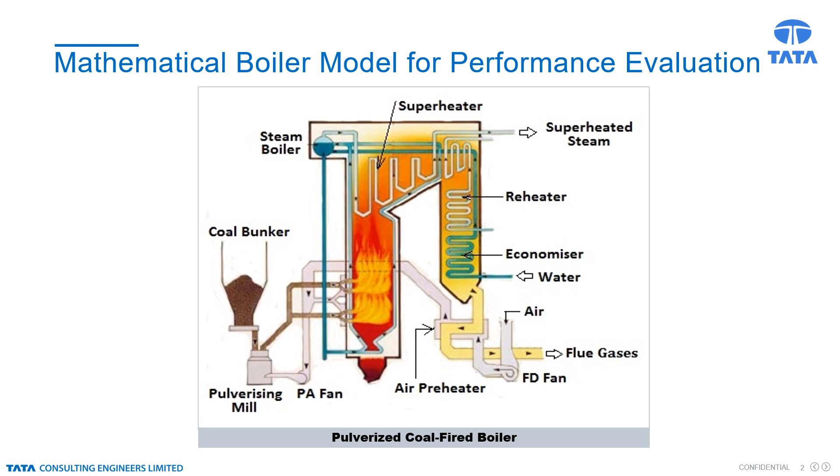Mathematical modeling of boilers for performance evaluation. Boiler is one of the critical equipment in a power plant. A well-designed and operated boiler is important for its performance and reliability. In this video, I would be explaining the details of the boiler model developed by Tata Consulting Engineers, TCE.

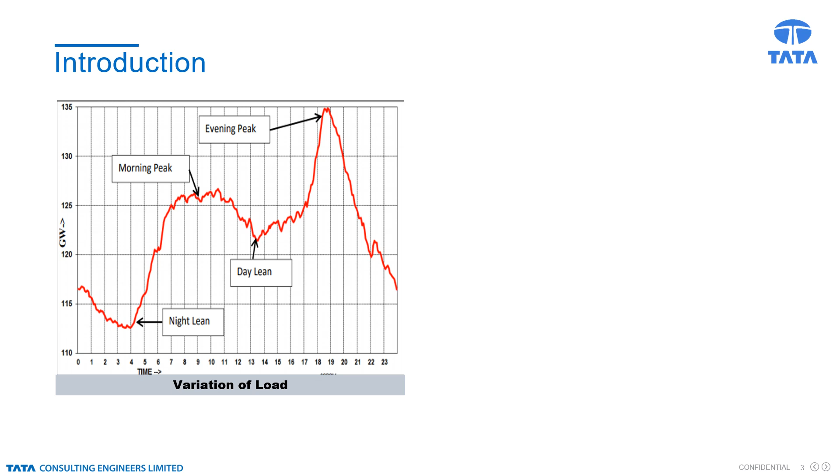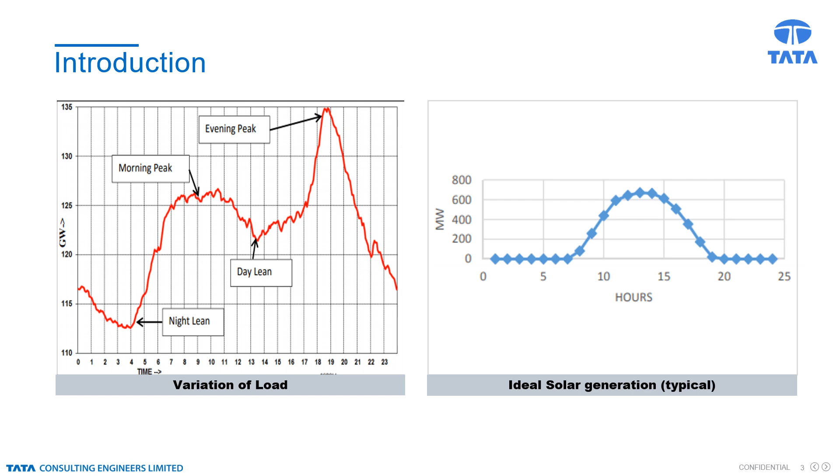Indian power sector is going through a transformation phase with focus on green power generation. Coal power plants, originally designed for base load, are forced to operate under partial loads to take care of the variable nature of renewables. Dealing with variation in coal quality and flexible operation of coal power plants without compromising on safety, performance, and reliability are the present challenges.

Mathematical models can be used to evaluate and predict boiler performance under variable operating conditions. TCE has developed a steady-state mathematical model from first principles for pulverized coal-fired boilers.

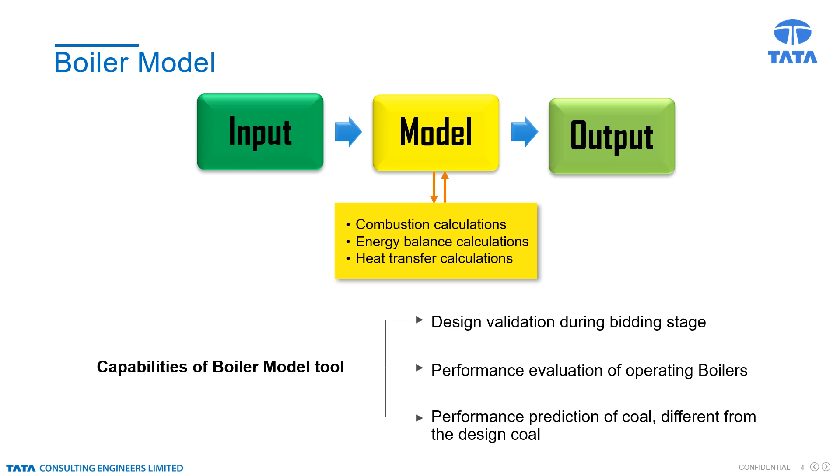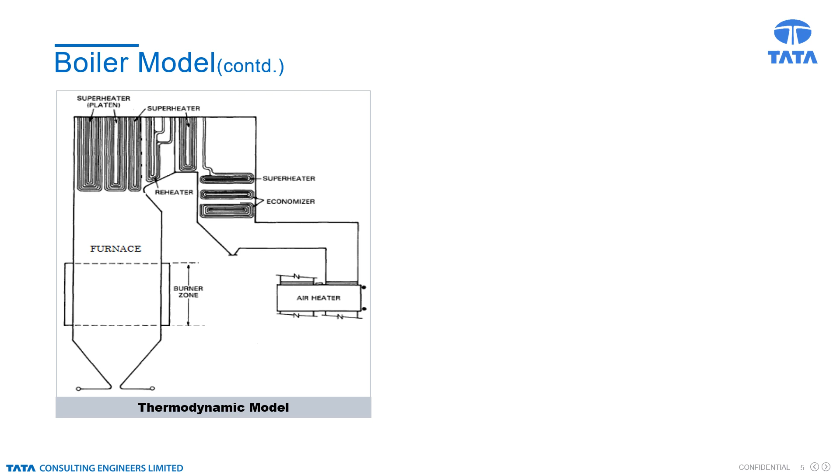The boiler model has the following capabilities: design validation during bidding stage, performance evaluation of operating boilers, and performance prediction for firing another coal different from design coal. Online performance tools with built-in integrated thermodynamic models can be used for real-time evaluation of various components and overall plant performance. The model uses available operating data and derives intermediate parameters along the flue gas path that are not available through direct measurement but essential for analyzing boiler performance and its health. The model would help plant operators to overcome the difficulties that arise due to change in load and fuel.

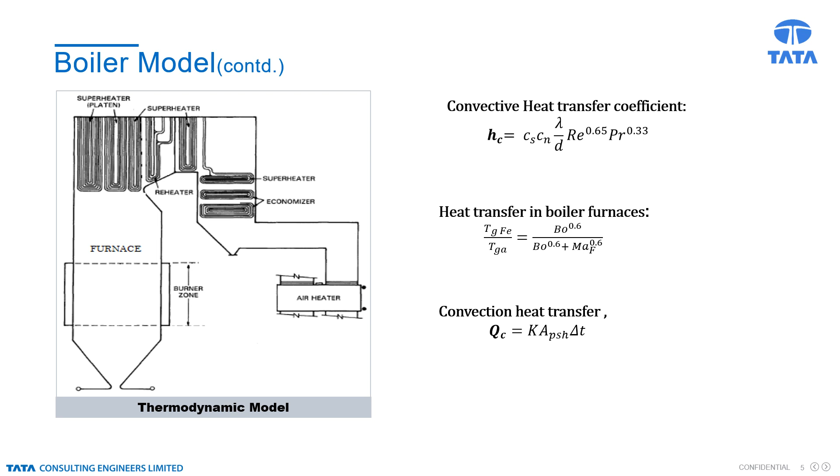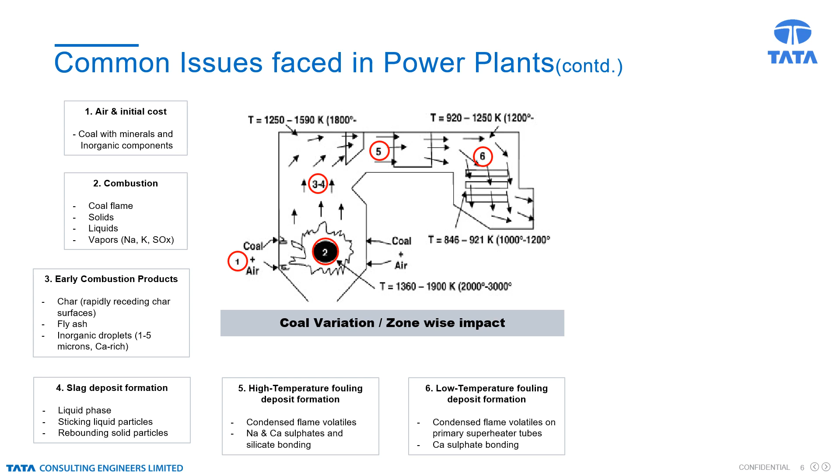Continued operation of boilers by firing coals different from that of designed quality may lead to reduction in boiler efficiency, excessive superheater or reheater tube metal temperatures, and increased erosion of heat transfer tubes. All these parameters ultimately affect the performance and reliability of the boiler.

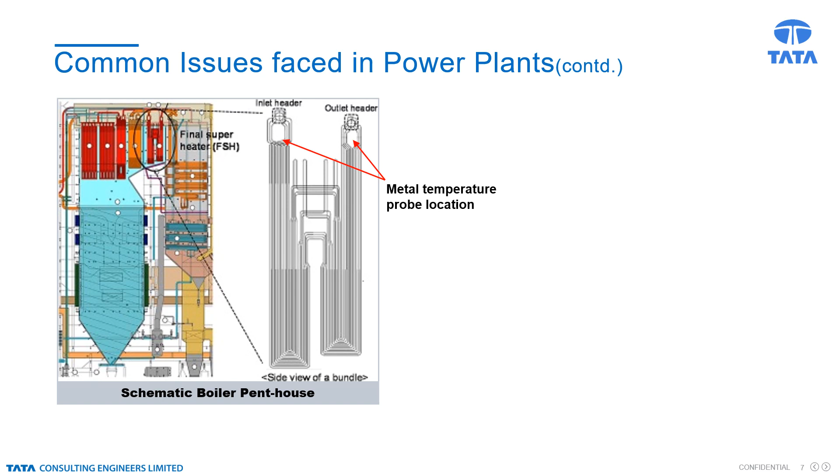Metal temperatures of heating elements are measured in the boiler penthouse at the inlet and outlet tubes. These measurements do not represent the maximum temperature location of a heating element, particularly for those subjected to direct radiation from the furnace. If tube metal temperatures are calculated along the tube length, considering heat flux variation, it would represent the maximum temperature location that enables boiler reliability.

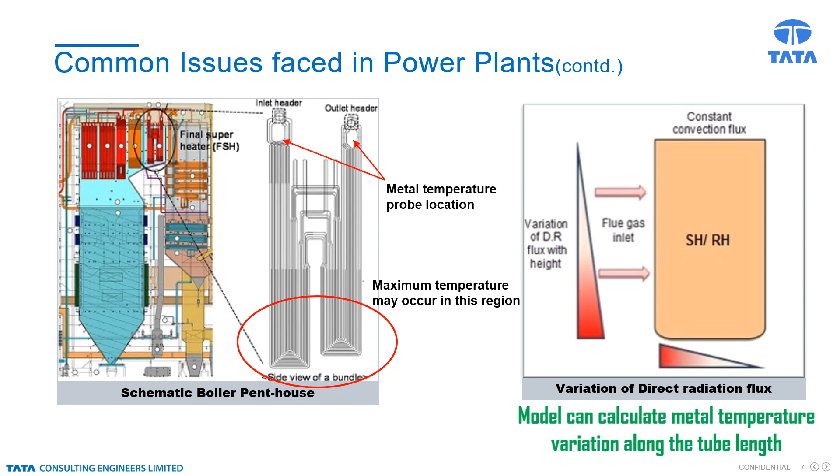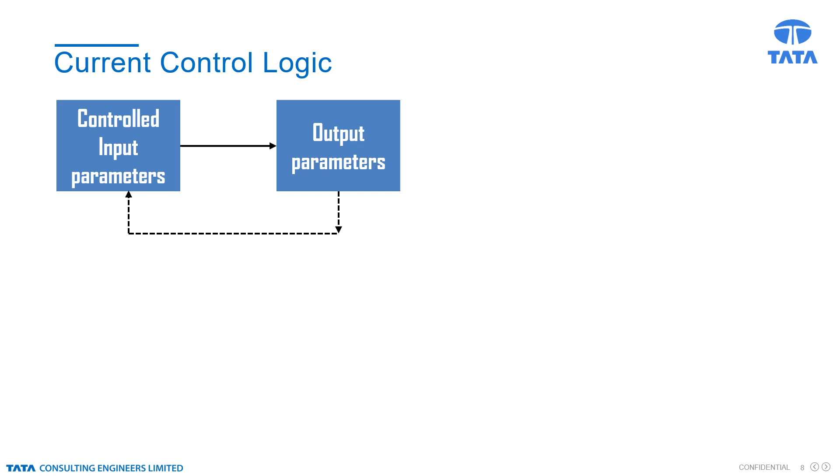Usually, a boiler operator has few input controls such as coal quantity, excess air, and burner tilt to maintain output parameters such as steam flow, superheater and reheater steam temperatures, and boiler exit gas temperature. To achieve the required output parameter, control logics are focused on input control, but this may not ensure boiler reliability.

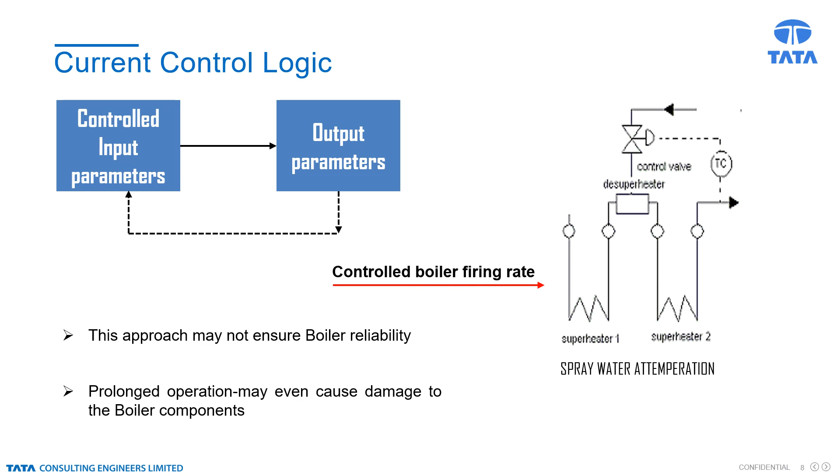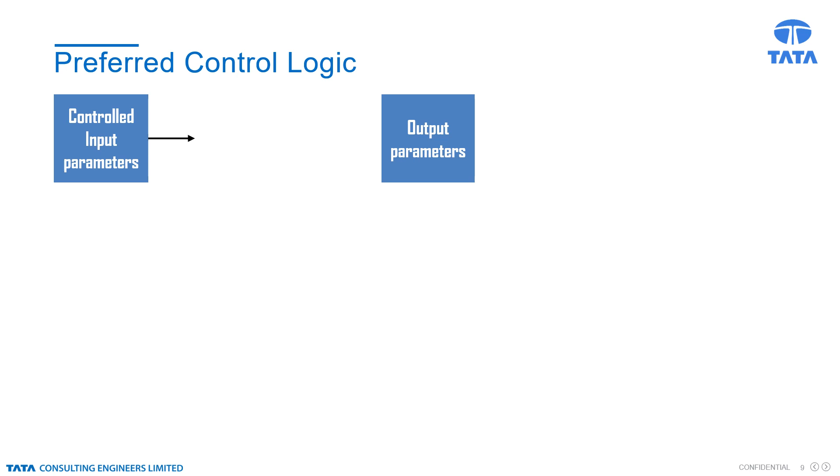For example, high main steam temperature initiates attemperation to reduce steam temperature to protect steam turbine components. Overheating damage, however, may have occurred in the boiler tubes upstream of the attemperation point. The better way to maintain the desired output parameter is by controlling input parameter and also maintaining in-process parameter within the design range as shown in the figure.

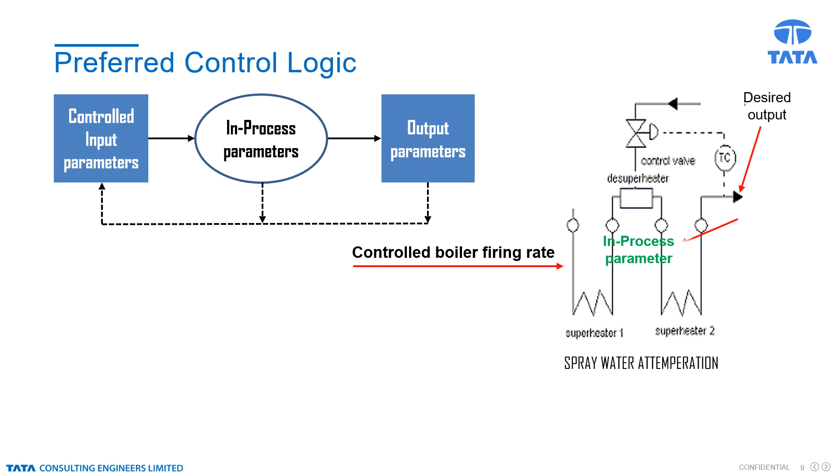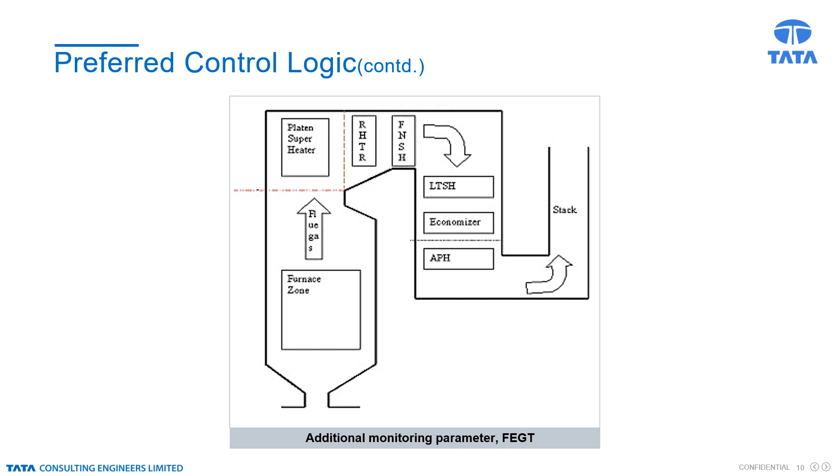As such, the number of in-process parameters are limited in the boiler design. Hence, additional in-process parameters would be helpful to achieve boiler safety and reliability. In the boiler, after combustion of the fuel in the burner zone, the next monitoring parameter in the flue gas path is the economizer outlet temperature.

Furnace exit gas temperature (FEGT) is one of the most important parameters in boiler design, which separates both radiation and convection zones. If FEGT is maintained within the recommended range, problems associated with slagging and fouling can be controlled. Hence, utilizing FEGT as an additional monitoring parameter will enhance boiler performance and reliability.

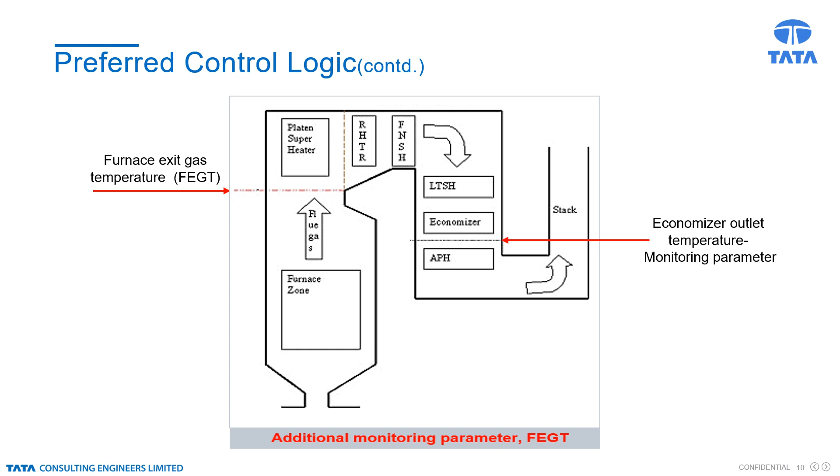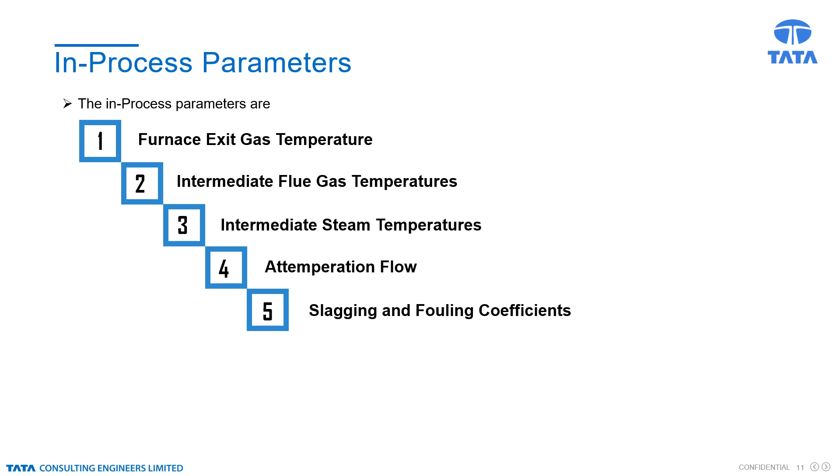Some of the in-process parameters in the boiler are furnace exit gas temperature, intermediate flue gas temperatures, intermediate steam temperatures, attemperation flow, and slagging and fouling coefficients. The boiler model can derive all the above in-process parameters which would enhance boiler reliability.

To understand the heat transfer mechanisms across the boiler, furnace, radiation, and convection sections are studied separately. Calculations are performed by solving energy balance and heat transfer equations simultaneously. The base model is then created utilizing boiler design data. The model is then validated using data for other load conditions.

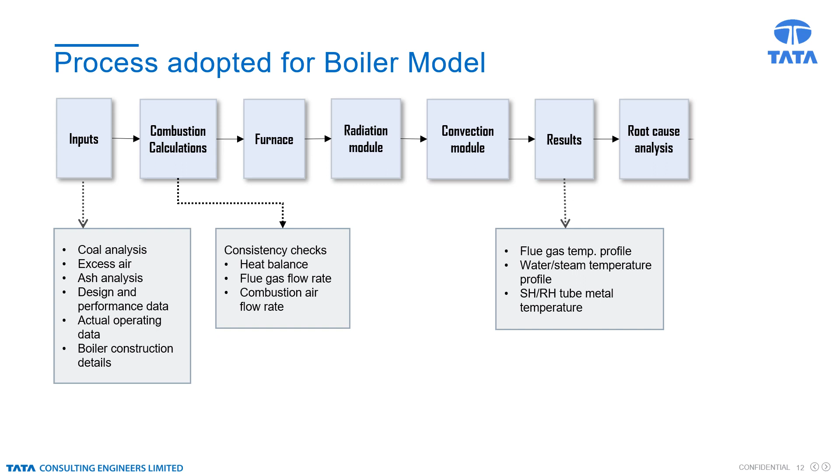The model is applicable for both supercritical and subcritical boilers and is agnostic to coal quality and boiler manufacturer. The model is validated on many pulverized coal-fired boilers of varying capacities ranging from 80 MW to 1000 MW. All the boilers, which include subcritical and supercritical types, are validated successfully.

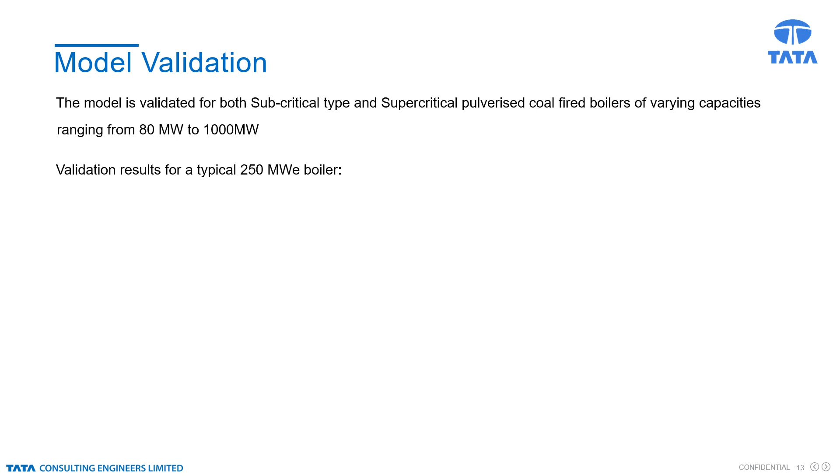A close match between design and calculated parameters are observed in flue gas temperatures, water and steam temperatures, and heat absorption by each of the heating elements. The validated model is now available to apply on any boiler.

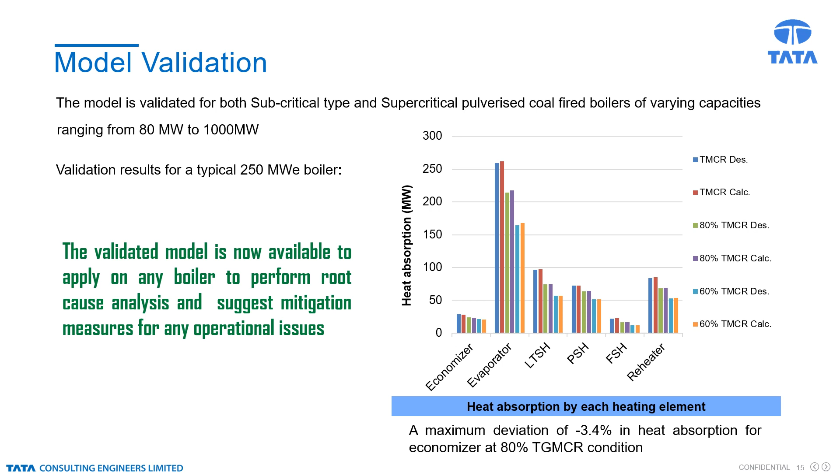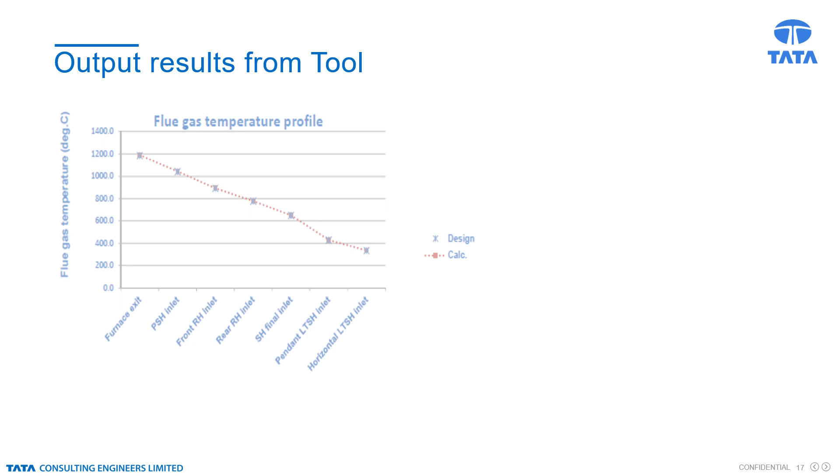The validated mathematical boiler model developed by Tata Consulting Engineers is now available to apply on any pulverized coal-fired boiler. The model assists in arriving at a root cause analysis and in troubleshooting to resolve operational issues. Proactive operation, root cause analysis, and in-time corrective measures can improve performance and reliability of the boiler. The developed boiler model would help plant operators to overcome the difficulties that arise due to varying loads and coal quality.